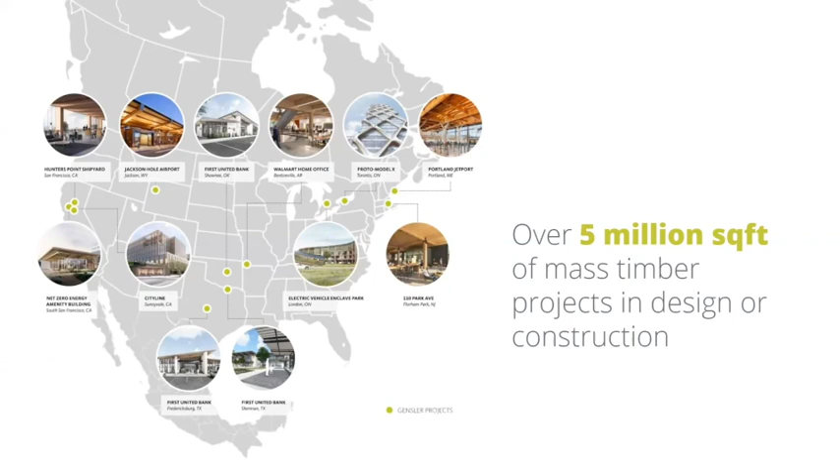Now, Gensler, we have a small office in Australia, but we're actually a huge worldwide company, and we're designing about 5 million square feet of mass timber buildings right now, a big chunk of that being for Alphabet and Sidewalk Labs. And we're also doing things like a couple of million square feet for Walmart. Their entire new office campus is going to be mass timber and net zero, and then some smaller bespoke projects too. But the one we were doing for Sidewalk in Toronto is a bit of a unique opportunity.

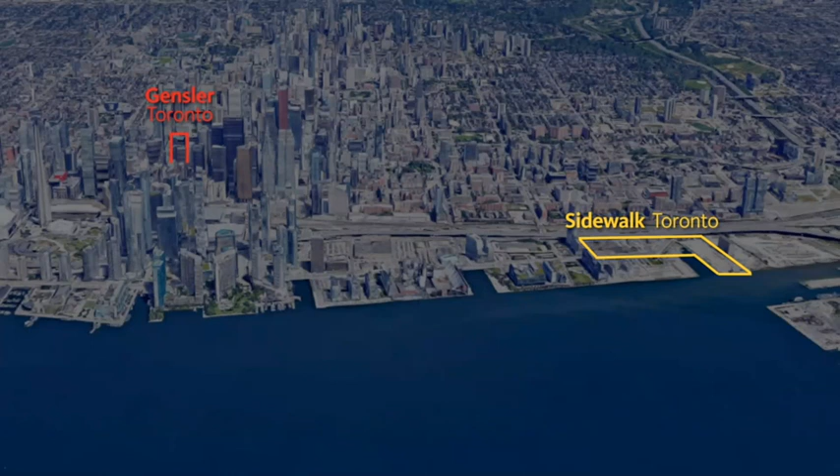Toronto's a city right on the lake, pretty dense, pretty high rise. The new buildings going up around here average 30 to 40 stories and taller. And we had this brilliant site with Sidewalk right down on the waterfront, which had its own unique challenges, but gave us a pretty interesting opportunity to do something new in a big space on the water.

And we took the approach of doing this the same way that the car industry does. They do these incredible prototype cars which test the absolute limits of what is possible. And those cars don't generally make it onto the road. They make it to motor shows, and you see them on the TV. But they're there because they're testing the boundaries, and what they learn during that gets fed back into the real projects. And that's exactly what we did with what I'm going to show you today.

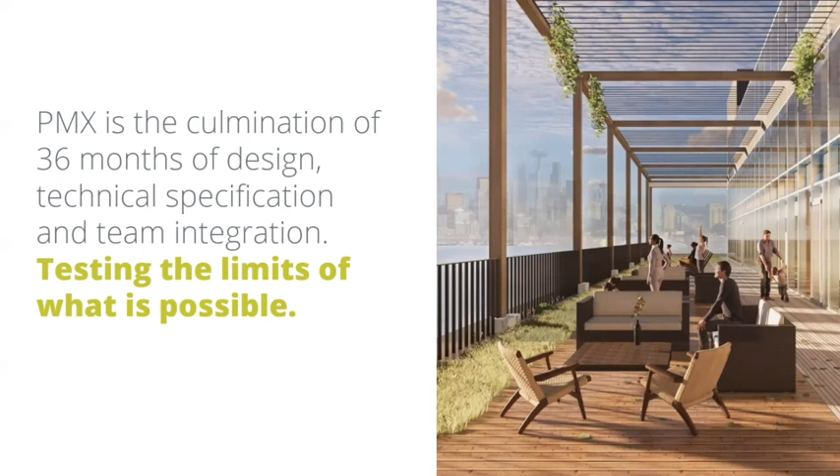So as I said, this is a culmination of about 36 months worth of work, or 3 years. And we got right into the detail. And you'll see later on that we actually literally counted every single screw that was going to be in this 35-story building so that we knew how much carbon there was and where all of this stuff was being sourced from.

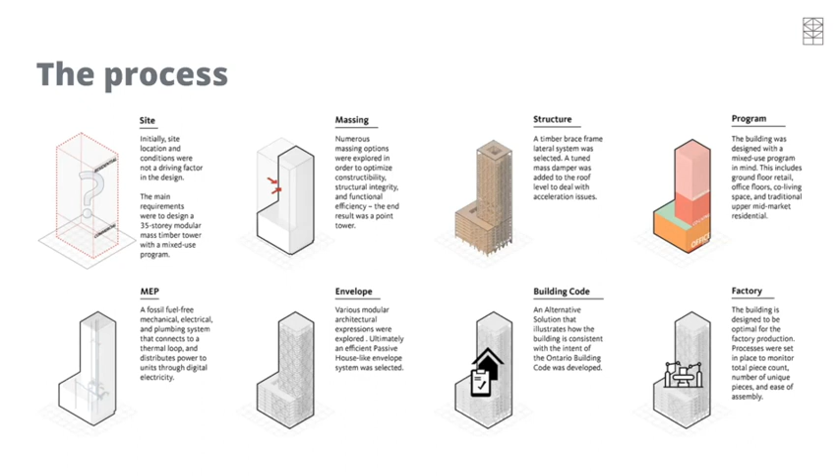And we started off with a pretty typical process. We had the site, obviously, we worked through the massing, the structure, and the programming. We wanted to make this as realistic as possible. So not just my team here at Gensler, but we also had structural engineers, mechanical, electrical, wind analysis. We did tunnel testing and all that kind of stuff. So we went through the full process of how this was going to work, and actually made submissions to the city as well.

Now, the first thing when you imagine designing the tallest mass timber building in the world — the tallest right now built is about 20 stories, and we're going to between 35 and 40 with this — was actually getting the structure to work. And given it's a prototype, we wanted to test everything, we wanted to be total purists. So a completely mass timber structure, no concrete, no steel, trying to make it work. What could we do if we're absolutely pure in our idea?

So we started testing a few things. We looked at steel braces, we looked at a concrete core, and we looked at the mass timber core. Now, for a 35-story building, and there's a lot of them in Toronto, a concrete core is the obvious approach. Now, that's fine, but if you try and build a concrete core without the floors around it, or you make the floors out of mass timber, you basically have this 150 meter high toothpick, which is not going to stand up. And that really didn't work.

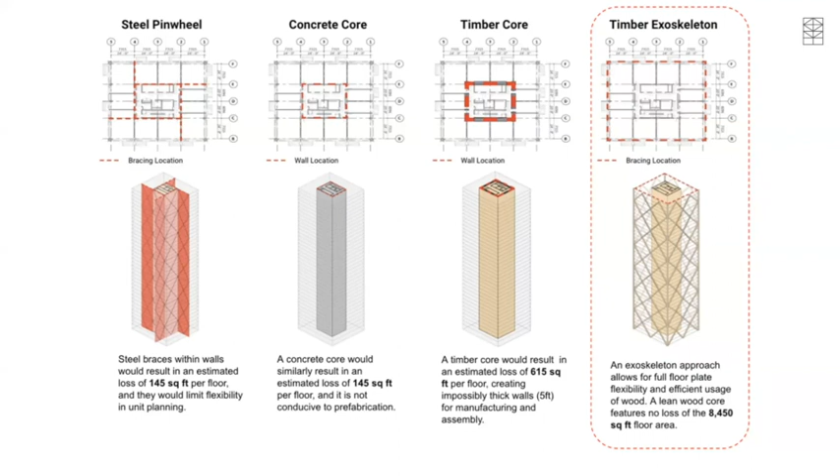We managed to get a version using a mass timber core, which did work, but the walls for that were 5 feet thick, so about 1.5 meters thick. That's really not practical. What we actually landed on was an exoskeleton approach. Now, typically, you wouldn't do an exoskeleton in a tall building until you got much closer to 70 or 80 stories, or you're in a high seismic zone. But because the mass timber building is so light, we actually ended up having to use that approach to lateral support much earlier in the process and much earlier in the height.

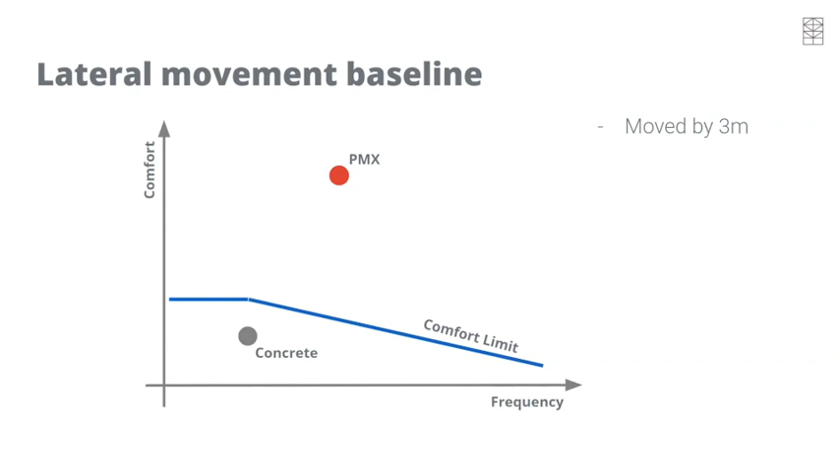Now our mass timber project, the first time we designed it, was way out of line with what would be comfortable. And although the building didn't collapse in the wind tunnel and in the structural testing, it did move by 3 meters at the top, which is pretty significant. You get very, very seasick if you're in that project. So we started looking at options.

Okay, what if we stiffen up the frame, we improve the connections, we try and add reinforcement to it? Well, what actually happened is that basically the entire exterior of the building started to become pretty much solid. We had increased steel in the connection pieces that we wanted to keep away from. That increased the carbon in the building and it blocked a lot of the windows.

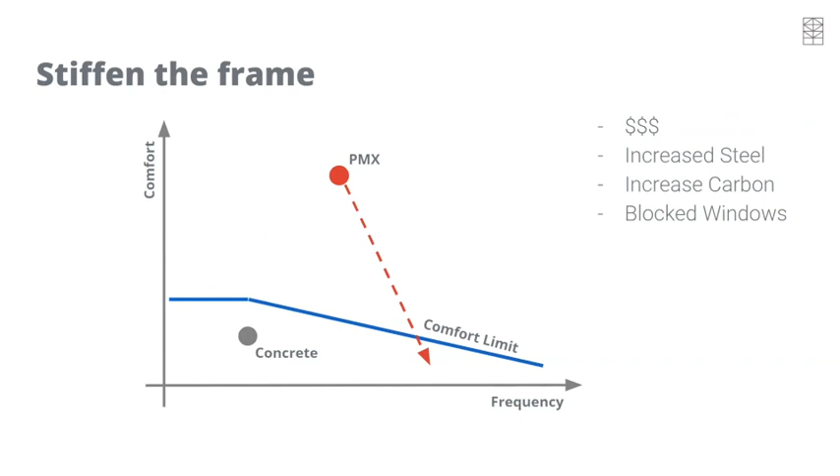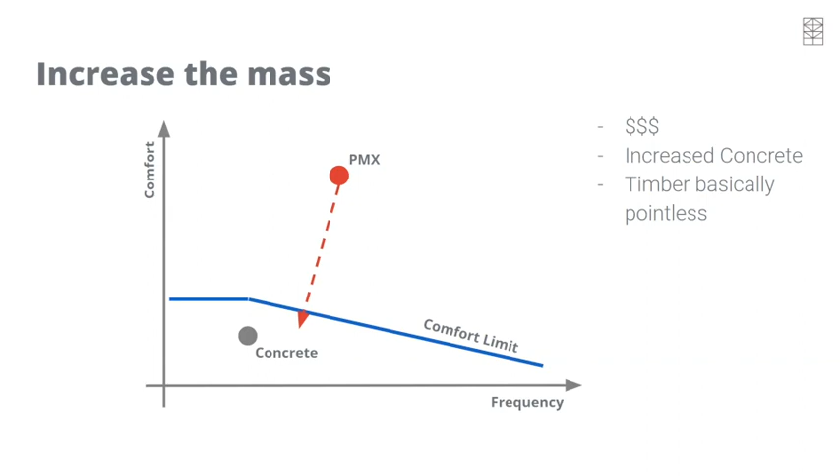So then we looked at increasing mass. Now that's a very easy way of bringing the frequency down and bringing the amount of movement down in the building. But we actually then ended up adding concrete to every single floor and concrete to the top of the building. And at that point, doing it in mass timber was basically pointless.

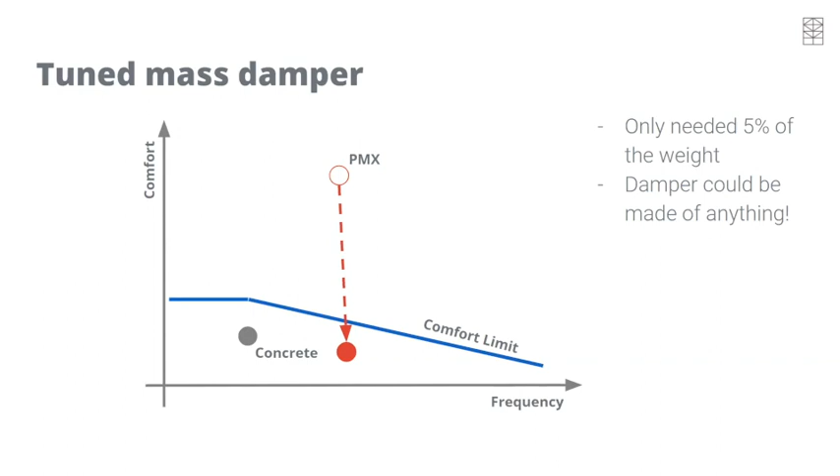So the third option: how do we actually make this work given the amount of movement in a pure timber structure? And that was by adding a tuned mass damper. So we added that damper to the top of the building. It needed to only weigh about 5% of the weight of the entire structure, which is surprisingly small. It's about the size of a minivan. And the damper could be made of anything.

So this is the type of damper we ended up with. This moves in 3 directions here, and it can be tuned to the same frequency of the building. So you can install this, knowing roughly what the building conditions are going to be, within engineering limits, obviously. And then during the life of the project, you can actually tune this damper to make it more effective.

The cool thing about this one as well is that those steel plates you see on top here can actually be made of anything heavy. So because we had space to do it, we looked at using low carbon materials such as recycled stone or anything like that, which could be taken out of the ground and not really processed. So our final mass damper design actually had a large amount of waste aggregate material in there to provide the mass.

So that was honestly nearly the first 6 months just trying to make this thing stand up. But once we'd done that, Sidewalk Labs and Alphabet challenged us to, if you're going to do this, great, but you've got to be able to build it off-site in a factory where it's safe and clean and we can drive down waste. So how do you take a 35-story building, put it on a truck, from a factory, and what kind of size and types of parts you need to do that?

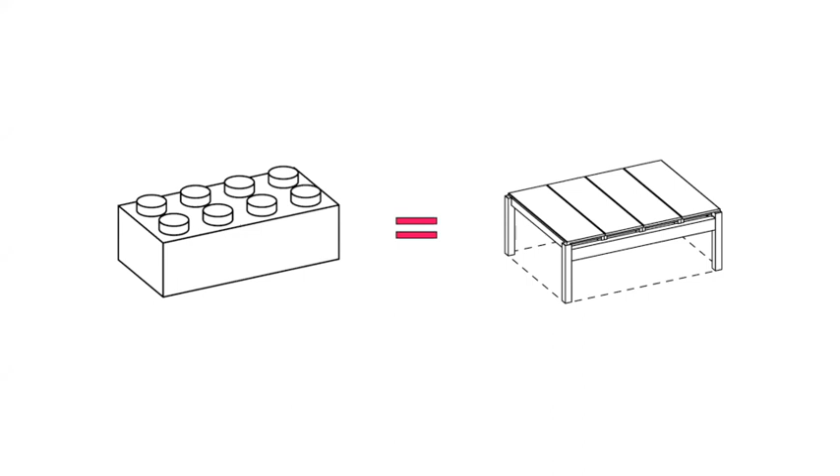So prefabrication, it's great. Using my favorite prefabrication analogy, what is our Lego brick? And once we've figured out our Lego brick, we could figure out how to put the building together, and we could figure out the amount of variation we wanted. So for us, the Lego brick was one structural bay. Once we'd figured that out, we could go anywhere and we could build any shaped building using it. But that's not that simple.

That one Lego brick needed to be small enough that it could be made of a single piece of mass plywood, in our case, MPP. It needed to be able to fit on a truck. And then when you assembled those bricks together, you needed to be able to create a grid that was large enough to park cars under it, had a column span that was useful for office layouts, and could be modulated to create residential suites as well. So unfortunately, none of those things line up.

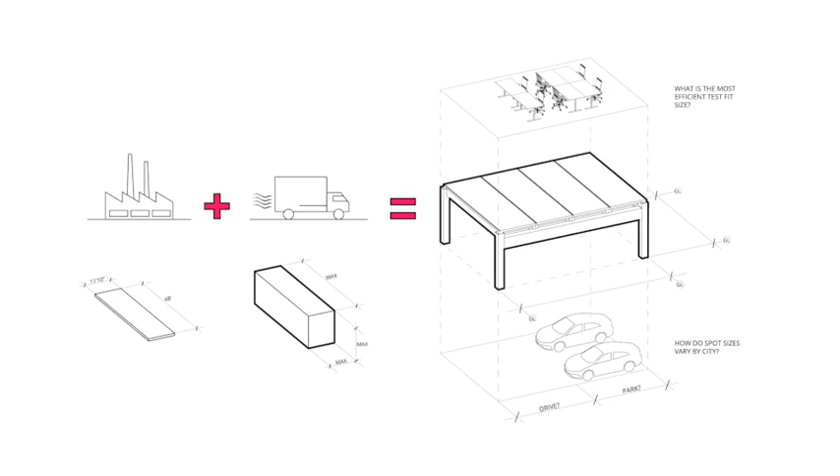The material coming from the factory was basically 12 feet by 48 feet. The maximum size that we could ship in a truck was 10 feet, so slightly smaller than could come out of the factory, which is as ridiculous as it sounds. They can create something in a factory and they can't get it to anywhere. And then none of that lined up with cars. So we actually spent a lot of time figuring out, okay, how do we combine these pieces or these Lego bricks together to make a module that's really going to work for the building?

And once we'd started working through that, we realized it wasn't just the floor and the columns that we needed, but we also needed to figure out how to prefabricate all of the structure, the columns, the girders, the floors, pieces of floor, the braced frames that are going to deal with lateral and seismic issues, how do we prefabricate the facade panels? And then we started working with a bunch of other companies, including people like SurePods and Kone, to develop systems for prefabricated elevator cores, prefabricated washrooms, and kitchens too. So all of these pieces would come together as a kit that could build a building with almost nothing actually built on site.

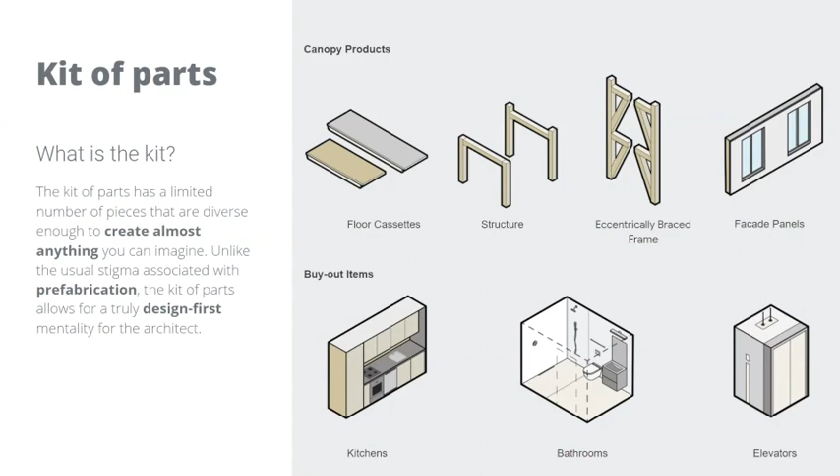So here's what they look like. This is our typical one grid bay. You can see it's actually made out of 2 floor cassettes, and I'll get into that a bit more in a second. But 2 floor cassettes come together and sit on the girder, and then we leave a space above the girder for the services to run through, so that always the mass timber is the first thing you see as you walk into one of these rooms, and the services are above that.

Now we're using mass plywood and LVL. LVL is essentially very similar to mass plywood. That means that you get a kind of wearing face on one side and then the edge of the plywood on the other. So just imagine these as 600 mil thick, in some cases, pieces of plywood.

So plugging into that mass plywood frame or LVL frame, we then had the floor cassettes. Now we wanted to get as much of this prefabricated as possible. So we started with 1 sheet of mass plywood, 20 feet by 10 feet, which fit nicely into our grid. Underneath that, we added the ribs, which act like purlins, basically, that span in the opposite direction to the beams. And then we loaded it up with everything that you need for a building.

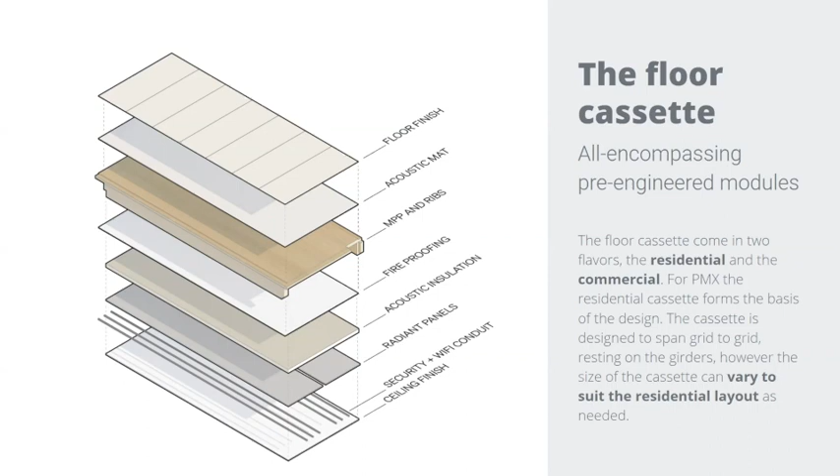So right into there, we're adding the acoustics above and the floor finish. Below, we're adding the fireproofing, the acoustic insulation, radiant heating and cooling, security conduit, Wi-Fi conduit, all of that kind of stuff, and a ceiling finish. And that actually forms a prefabricated piece then that we can use in multiple different ways and multiple different locations. All of that MEP and everything that goes into it, it's all pre-inspected and has one connection point, which is back at the corridor. So we can create these very clean suites very quickly.

And we did the same for the facade. So again, based on a mass plywood panel, in this case a bit taller because we had higher floor-to-floor height, but the same width as the structural grid. And onto that, we layered up everything that you need for a high performance facade. So the air vapor barriers or vapor control layers, tying in the windows and using passive house windows to do that. About 150 mil of insulation, and then a rain screen system.

Now, the nice thing about this is, all of these pieces are laser cut in the factory or CNC'd. So we could actually take that panel, cut any size and shape window or door opening in it, create bigger or smaller windows, and then layer up our pieces on that. But the actual connection details never change. So the connection from one panel to the next, we could design and test and never change it. The connection from the window to the panel, etc.

Because it was a rain screen system, you can then switch out that final decorative layer for anything you want. We tested metal cladding, fiber cement, even tested precast, which is kind of crazy to add concrete to a wood building. But all of these different systems can be integrated for a complete flexible design. Always coming back to this idea that if someone sees this building in the end and they can tell that it's prefabricated, then we've definitely screwed it up.

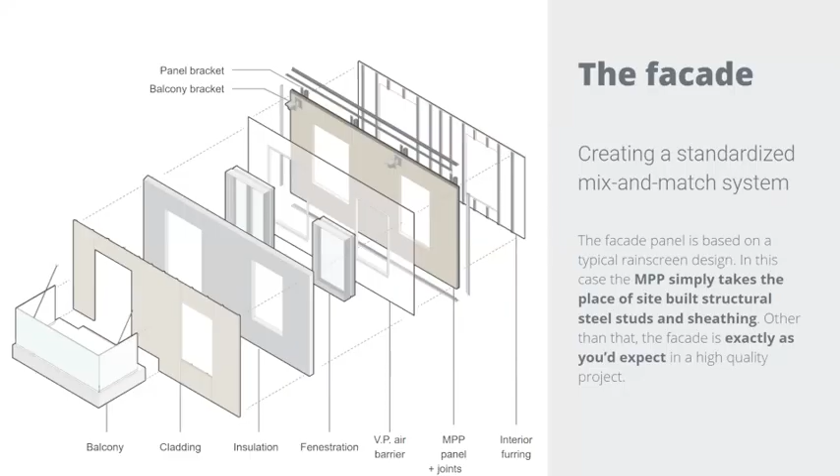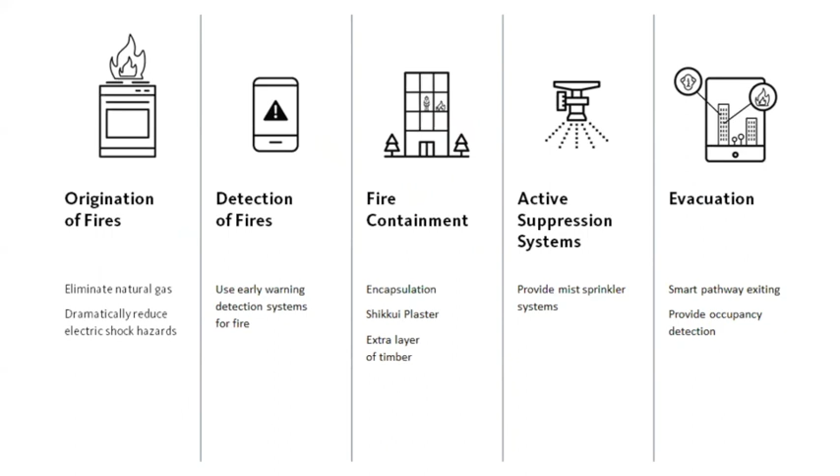Once we'd figured out our pieces, we then had to make sure they're safe, obviously. So we took this kind of 5-step approach, starting with stopping fires from happening and ending with getting people out, but having to deal with everything in between. Obviously, stopping fires being the main concern. How do you get them out of the building? So looking at fire data and what causes them, what we realized is actually there's 2 types of fire that we have to deal with. One is electrical and the second is cooking.

So both of those are very easy to get rid of. We took all of the electricity out of the building, which I will explain in a second. And we took all of the natural gas out too. So all of our cooktops were run on induction, so completely cold surfaces to prevent cooktop fires. And we had no chance of electrical fires because every system in the building runs on a VoltServer, which is essentially a very high-tech power over Ethernet system that's running 12-volt electricity throughout the building, and it's running direct current instead of AC.

Now that might seem like nothing would really work if you're just running essentially battery power throughout the entire building, but actually when you look around your home, everything in your home runs on DC right now. So anything that has a motor in it, anything that has a battery in it, all of that runs on DC. And using digital electricity, we could send 12-volt packages, as we call them, of power. And if you needed more power to run something like a hairdryer or a stove, you just send more of those packages. It's like just adding more batteries to something to get more juice into it. So that system is super effective.

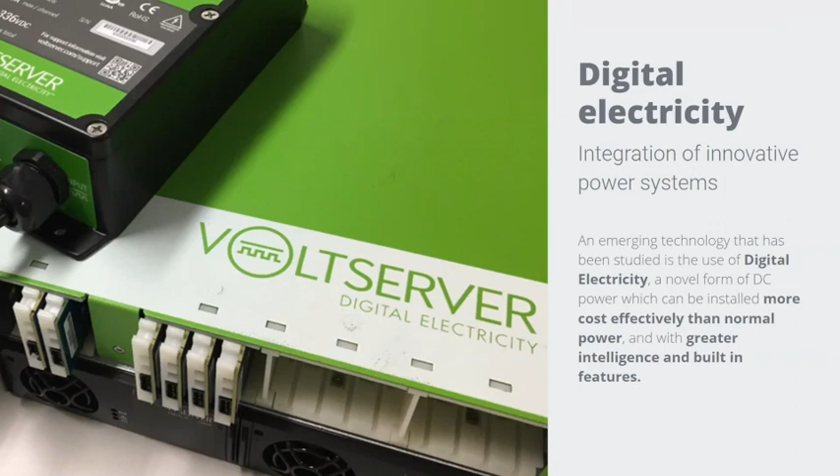Some of the offices that we've been doing with Sidewalk are now powered on this, and we have small buildings powered on VoltServer as well. And you can tell how safe it is because as part of our demonstration in the demonstration lab that we had open last year, you could actually go around, pull the cables out the back of the refrigerator and stick them in your mouth, and you were fine because they're just 12-volt power.

And then we got deep into the testing. So this is a good image really just to show fire testing of mass timber. And you can see that it looks seriously charred on the outside, but actually the timber on the inside remains relatively untouched. And there's been a lot of testing around the world on this now, but we did our own stuff just to double check it and using different products.

And essentially you can get an hour's fire rating on a piece of timber by adding 25 mil of what we call sacrificial timber to the outside. So that burns away, forming an insulating layer that protects the timber. So as long as you oversize your structural elements suitably, you can very quickly and very reliably get 1 hour, 2 hour, 3 hour protection on your beams and columns and floors.

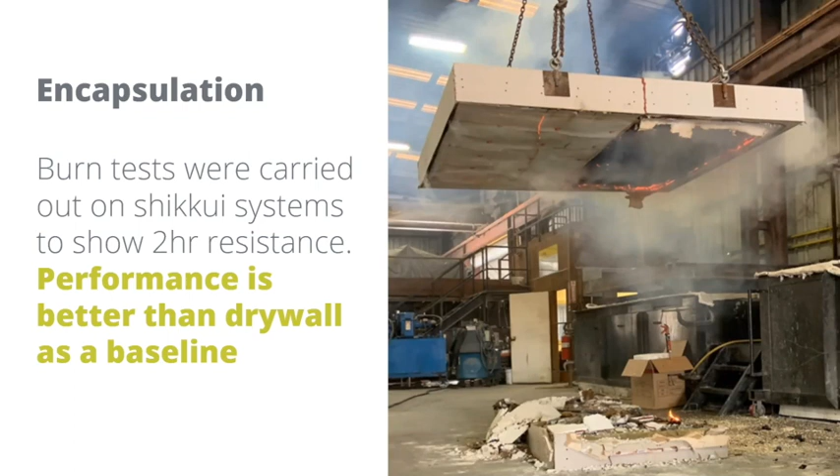But that compliant ceiling, even though it collapsed after 2 hours, is still compliant because it stopped the flames going through. Obviously, our system, with a lot of R&D and effort put into it and using some different spray-applied plaster systems, is not just 2-hour compliant, it's also firefighter safe because it's not going to fall on them as they come into the building.

And on top of that, we added the best in class life safety systems that we could find, and that included mist sprinklers. So very similar to a normal sprinkler, we have a pressurized water line, but instead of using typical faucet or tap pressure, we're actually using a really high pressure through a 12.5 mil stainless steel conduit. What that does is spray a high mist fog out, and that puts out fires very quickly. It also has the advantage that it's in the air, it gets under tables, it gets into cupboards, and it will actually put fire out in places where it can't physically see the fire.

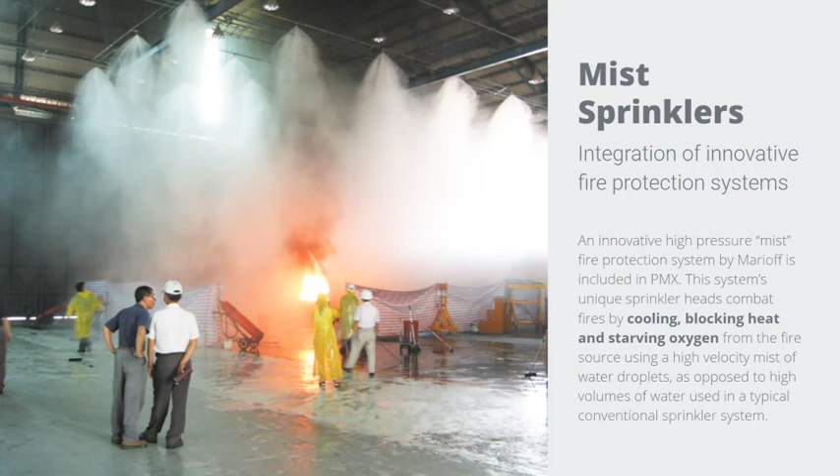Now, this system is very effective, but it also has the advantage that it uses about 10% of the water that a typical sprinkler system uses. So, this isn't actually about water conservation. This is about not flooding a wood building with hundreds and hundreds of liters of water and making all of the wood warp and swell and that kind of thing. So 10% of the water was a lot safer for us to put into a wood building without really damaging the building itself.

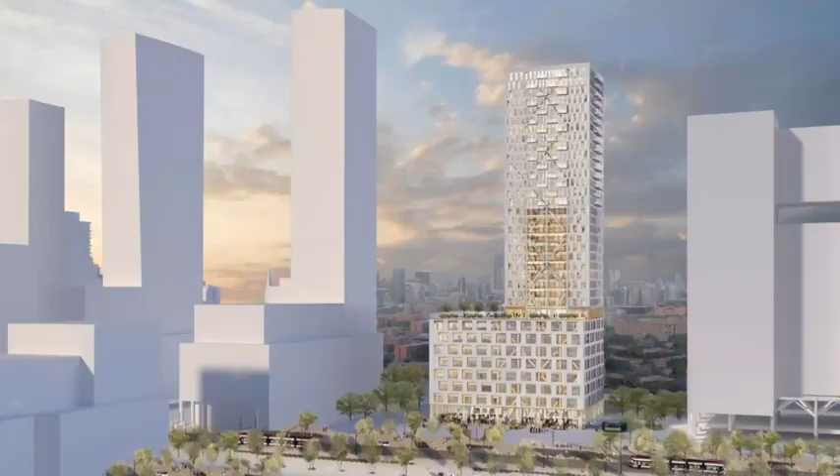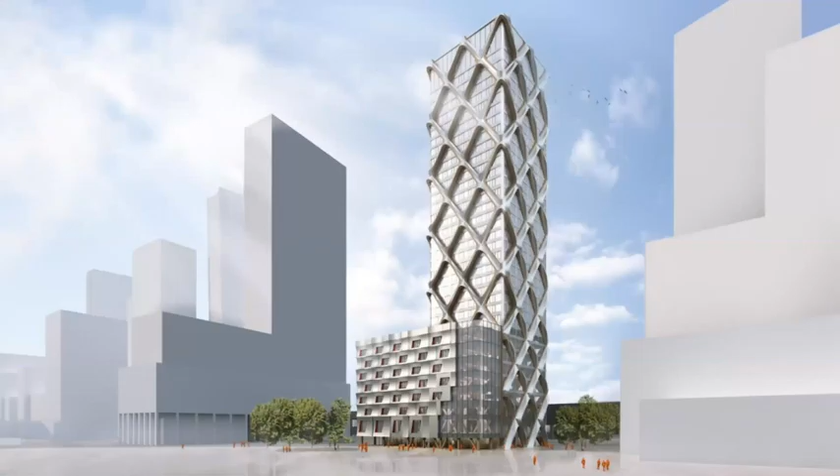So that's all the technical side. Then we had to really get into, how do we design this? So as the building stacked up and we figured out the pieces, we realized we could do a very simple tower like this. And we costed this one out. We had 2 contractors look at it. And this was right on budget for a tower in Toronto, so equivalent to a concrete tower. And then we did some fun versions as well, playing up the cross bracing, using different prefabricated facade elements to just see what we could actually do and see if we could make it more interesting.

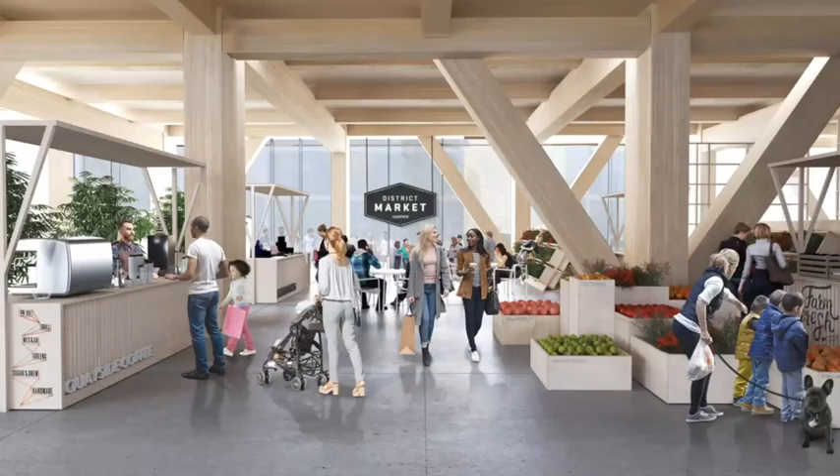And the same on the inside. So this is actually the ground floor of the 35-story building. This is using the fully engineered model. So you can see the connections there. You can see the cross bracing that exists. But these columns that everyone expected to be really huge actually aren't too bad in the space, and the column spacing itself is quite nice.

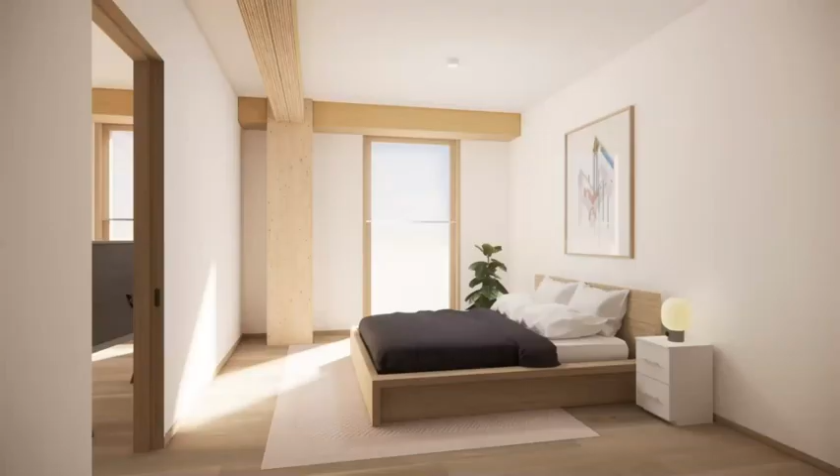And that worked out well for the unit plans as well. So in a typical residential unit, you can't expose the timber ceiling because we need that buildup that I showed you for the acoustics from floor to floor and for fire protection. But you will be able to see the typical beams and columns and the ribs and purlins. So you get this really nice natural Scandinavian type feel to it.

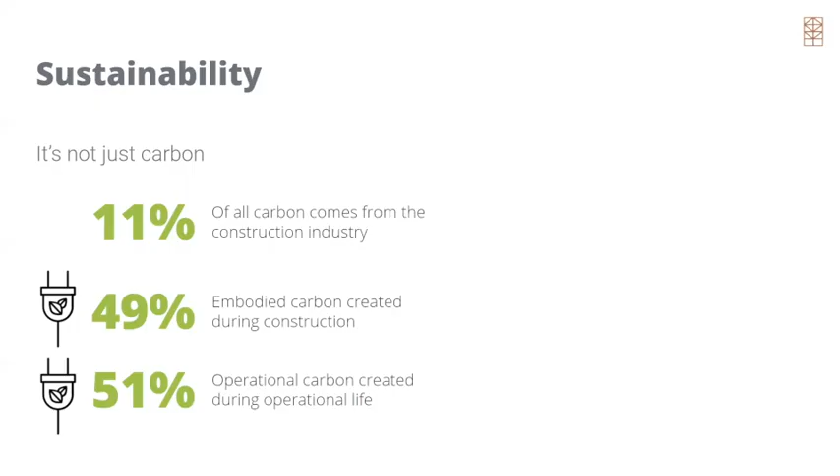So sustainability, this was really the last thing we tackled, knowing that we'd all the way through designed to passive house standards. We'd used low temperature radiant to heat and cool the building, which is very energy efficient. And we wanted to see how well we'd done before refining that down. So we started measuring two things.

As people will know, 11% of all of the carbon emissions in the world come from construction. It's about 4 or 5 times more than comes from the entire airline industry. But somehow we kind of dodged the bullet on that, and the airline industry gets in trouble.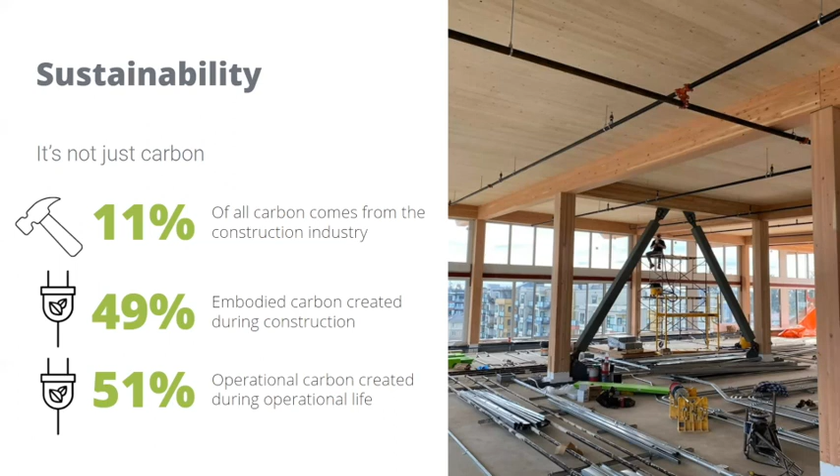But of that 11%, half of it comes from building the buildings and the other half comes from operating. So that means when you build the building, you're burning 50% of all of your carbon in that 1 year or 2 years of construction. The actual energy use to operate a building is very, very small in comparison. It's about 1% per year for the 50-year life cycle of the building. So we tackled embodied carbon first.

Now, there's kind of controversy over where embodied carbon sits in mass timber projects, but just as a baseline, if you delete the concrete frame above grade and switch it out for mass timber, you're going to make about a 40% saving in embodied carbon. And that's just really on the energy used to create and process the materials.

If you take into account sequestration, which is this idea that a tree grows and when it reaches its maximum height, it's absorbed all the carbon it's really going to absorb in its life. You cut that down and replace it with a new one, and you put that tree to good use. Then you can actually get down to about 2% of the carbon in a concrete building.

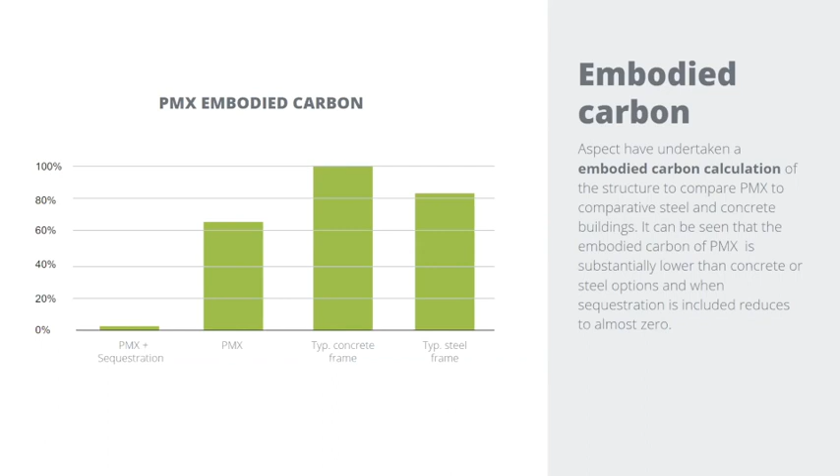Now that's really important that we're showing both numbers here because there's still some controversy around whether sequestration counts and how much of it you should count. So we're using both numbers just to be totally transparent.

And when we got into energy usage, as I said, we were passive house quality on the facade. We're using low temperature systems inside. But what you can really see very quickly is that the biggest saver, the window to wall ratio is great, we're about 40%, but air leakage was the big first saver. So if we could get that air leakage down, create a really tight facade, we could instantly save about 21% of the energy of the building.

Now, if we didn't do that, then nothing else that we do for the rest of the project would even help. So it's like the boat analogy. You can have a really great boat. If there's a hole in it, it's not a boat anymore. And the same applies to the buildings. So don't put any holes in them, and then we'll go from there.

So improve the glazing, got another decent saving. So we're down 35%. And then everything else relies on the MEP systems. Now, the facade and glazing performance is super important because if you don't get that first 35% of savings, you can't switch from a hot air system or a chilled air system to a radiant system, and therefore you just won't see the rest of the savings.

So with all that in mind, we're about 70% less than the code requirements or less than the ASHRAE requirements in terms of our energy use. And that's with actually allowing any tenant in the building to do whatever they want. So the rest of that 34% of energy, basically all of that is an assumption that a tenant could come in and put some kind of crazy 100-watt bulbs in their unit.

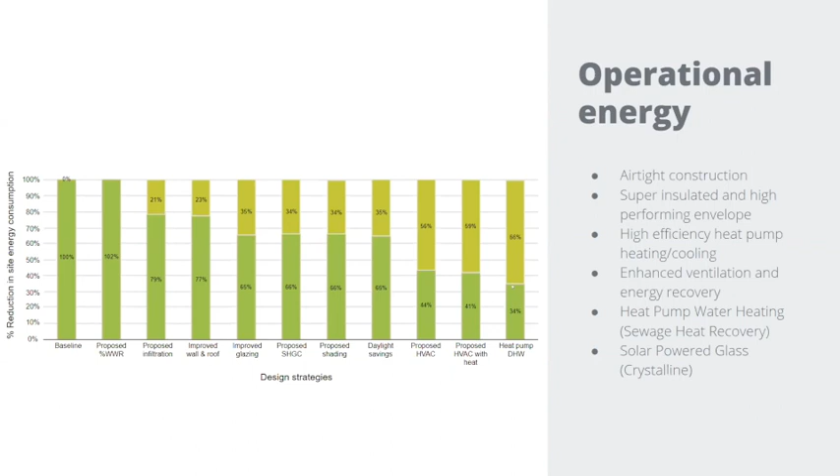So if the outside temperature goes below 0, our building will actually last several weeks before the internal temperature drops down. And that's really just because of the air tightness and the insulation. And what you won't see is the problems they had in Texas, which was the building and the building occupants freezing within the first 6 hours of the severe temperature drop.